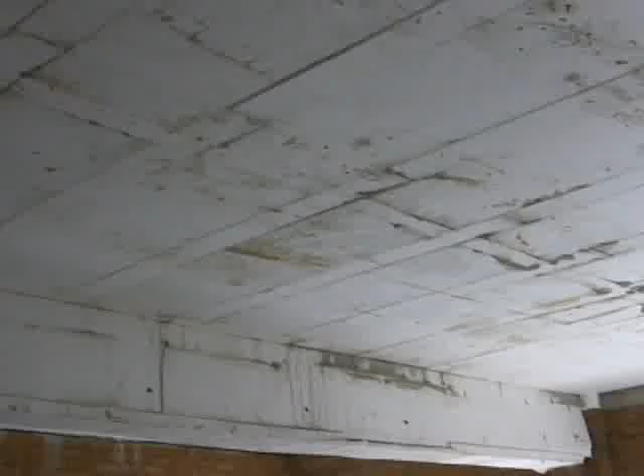Polyform grows out of many years of experience in the building industry in the field of design and manufacture of structural precast concrete. It unlocks the hidden potential of polystyrene for use in formwork. The inventions use polystyrene as formwork for all primary components in construction, namely suspended slabs, beams, stairs, walls and columns. We asked Wolf Binder all about Polyform.

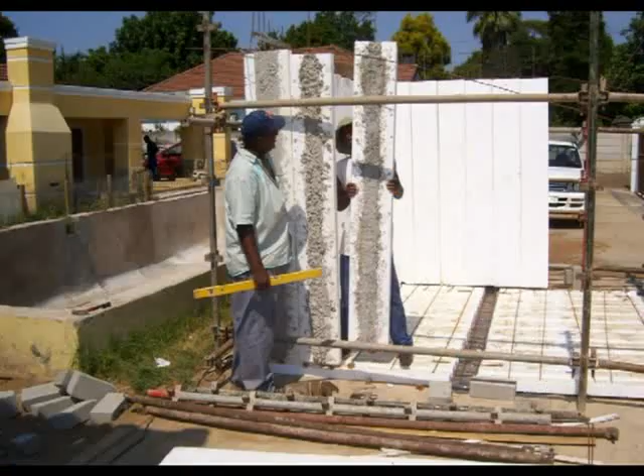In 1999, I received a call from a company in Cape Town asking if I was interested in buying an agency using polystyrene blocks in conjunction with precast concrete ribs for suspended slabs. I was already manufacturing precast concrete ribs in my precon factory and saw the potential in the use of polystyrene rather than precast concrete blocks.

However, I foresaw a problem as the coefficient of thermal expansion of polystyrene is far greater than concrete. This would cause cracks in the ceiling finish at the interface between the blocks and the ribs. I had some inspiration. What if I replace the concrete ribs with polystyrene and key these into the sides of the blocks? The bottom line is cost saving over the other systems, the principle of which is the number of advantages each component has. The polyslab has them all, and I knew I had a winner.

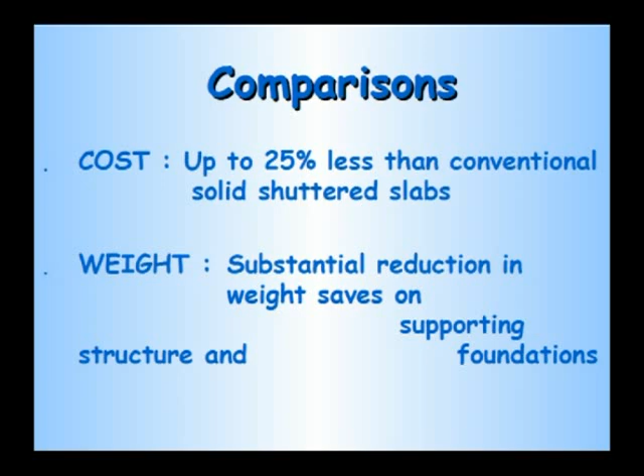Here they are, the blocks. Firstly, they act as fillers, replacing unnecessary concrete. Recycled polystyrene is less than half the cost of concrete. Secondly, the polystyrene is 2/100th the weight of concrete, resulting in massive weight saving. This weight saving dramatically saves on reinforcement required in the slab and reduces the size of foundations.

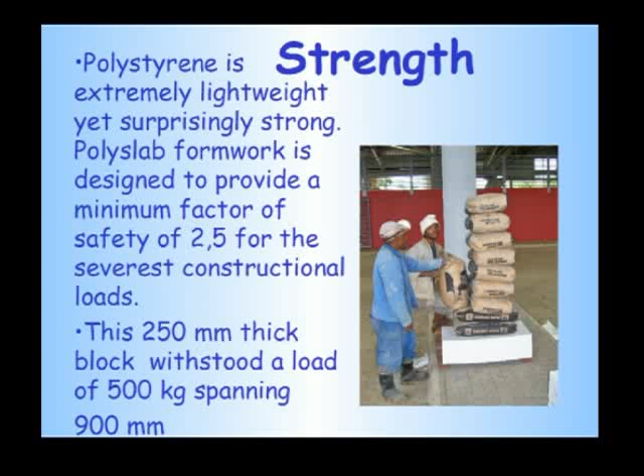Thirdly, they act as permanent shuttering and are strong enough to support the constructional loads and weight of wet concrete between lines of temporary supports. Fourthly, the excellent insulation reduces the need for air conditioning, resulting in substantial savings in the ever-increasing cost of electricity.

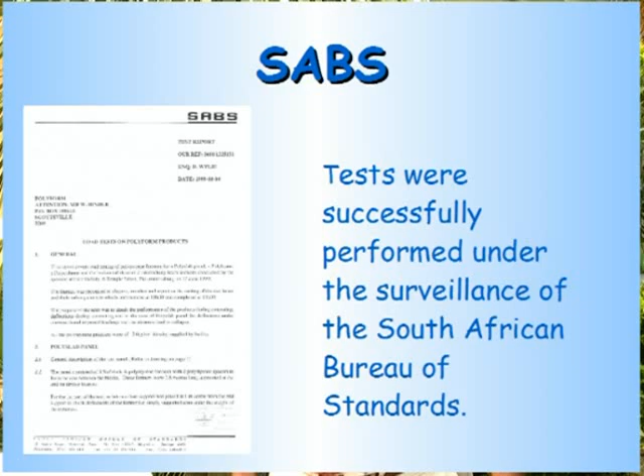The ribs, firstly, act as permanent shuttering. Secondly, by keying into the blocks, they are firmly supported. This also provides a seal against leakage of cement slurry. Fourthly, it also provides 15% constructional point load sharing between the blocks, proven by SABS tests. Fifthly, they provide additional insulation and a continuous polystyrene ceiling, avoiding cracks in the skim coat.

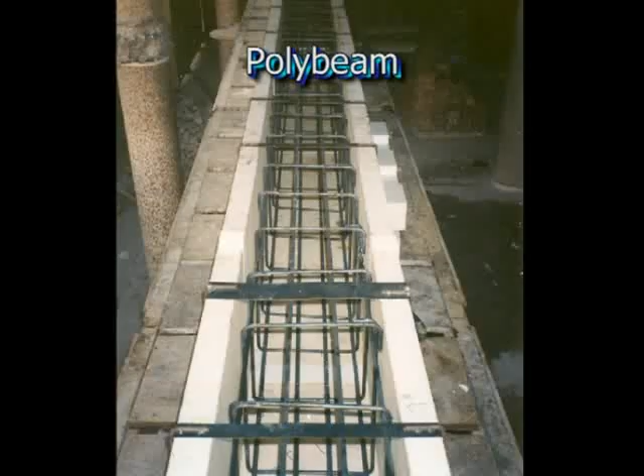We prepared design graphs for standard 2, 3 and 4 course deep poly slabs, which form part of a design manual available to engineers. I then invented the polystair system using the same design as a poly slab, but placed at the required angle. Polystyrene treads are then planted on the wet concrete topping, which are finished off with a ferrocement screed. High-density polystyrene formers for reinforced concrete poly beams and poly columns were also tested under the surveillance of the SABS. Polystyrene provided by our suppliers is fire retardant, non-toxic, moisture resistant, compatible with concrete and rot proof.

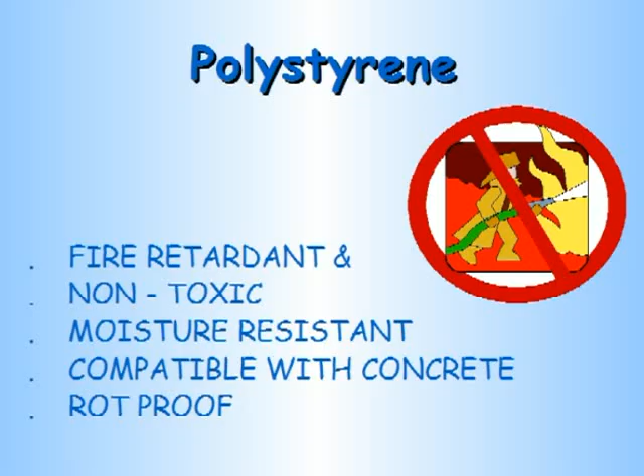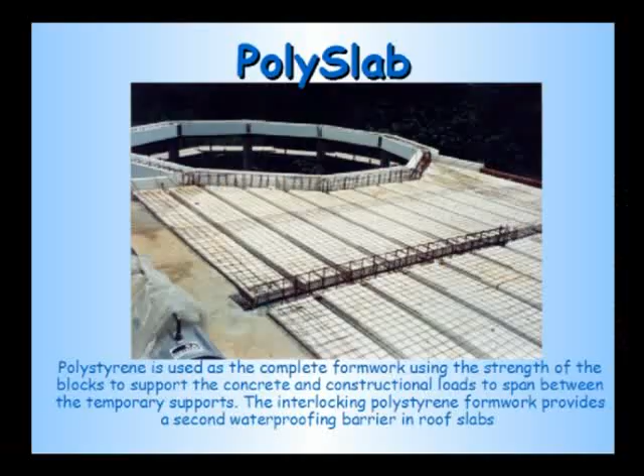The first builder to use the poly slab was so impressed with the price and ease of erection of the system that he bought an equal share in the business. From his investment, our patent attorneys conducted an international search of the poly slab, and we were granted a PCT patent. This opened opportunities to establish patents in 100 member countries and sell agencies of the products. Here are some of the first houses in which the Polyform products were used.

I received a call from the leader of a delegation of South African inventors asking me to join the team to the Geneva 2000 International Inventors Exhibition. I saw this as an opportunity to test our products on the international arena and was delighted when at the award ceremony we were first awarded the trophy from the Polish Institute of Inventors for the best exhibition on the show, and then a gold medal with a special commendation from the international jury.

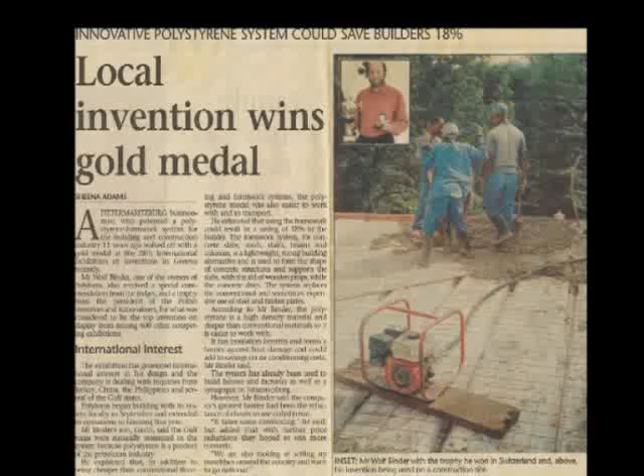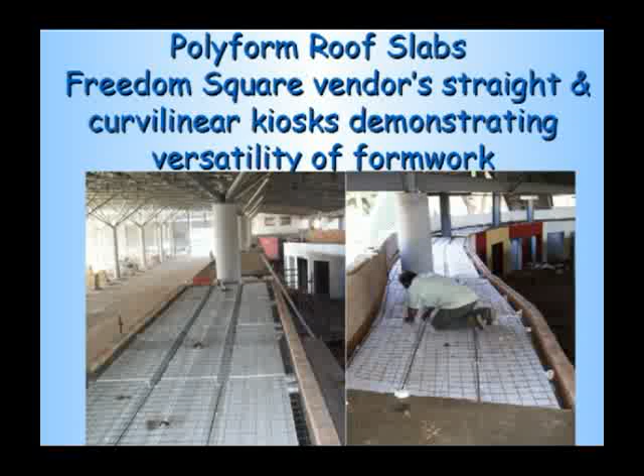In 2007, Polyform was awarded the contract of providing roof slabs over the vendors' kiosks in the Freedom Square taxi rank because it was the only system that could handle the curvilinear shapes. The Polyform retractable slab was used for a B&B in Hilton, as it has a suspended ceiling to provide space for services, making the ceiling configuration unimportant. The sides of the polystyrene blocks used have a slight taper, and the polystyrene is dressed with thin plastic sheeting to break bond with the concrete. This enables the formwork to be retracted and reused several times.

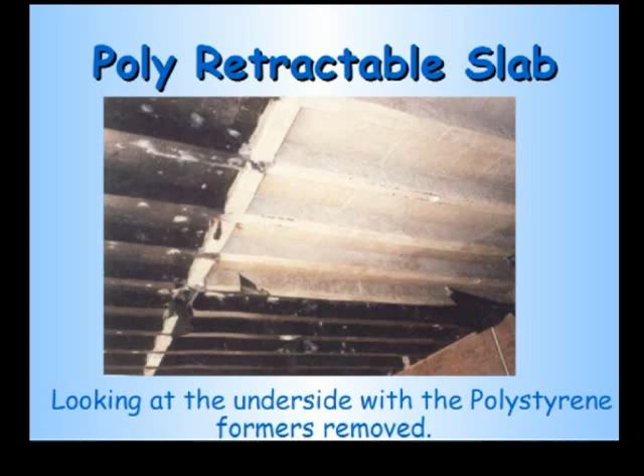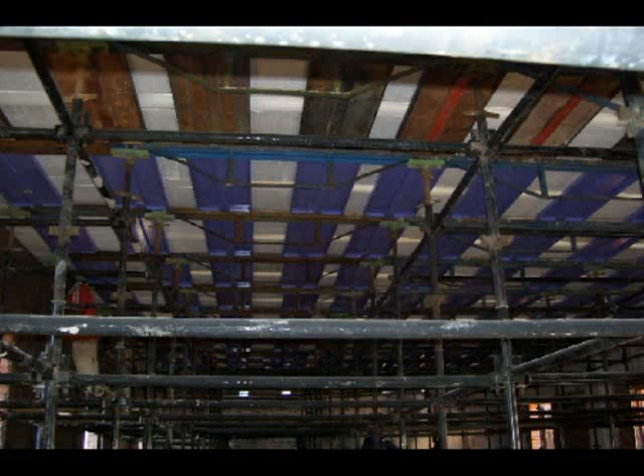The blocks used in poly slabs can be made to any depth, enabling spans far greater than precast concrete slabs. This slab used at the FET laboratory block is 500 mm thick and spans 9 meters. It also shows the typical temporary supports. Here are some of the buildings built over the last few years using the Polyform products.

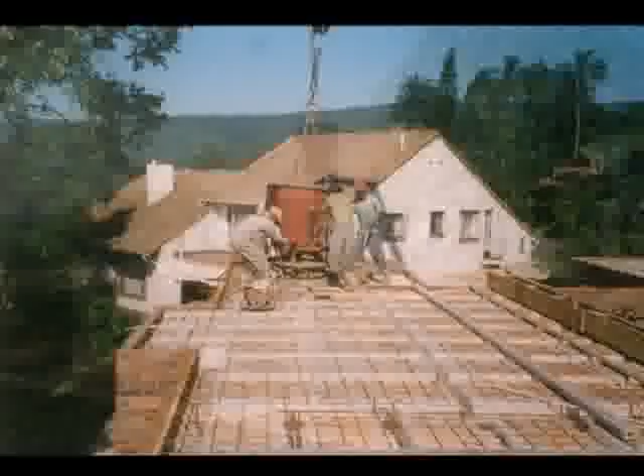Polyform also erects the formwork for all their systems. Hi, I'm Garth Roach. I've been associated with Polyform since the early days in the late 90s. I ran the Gauteng agency up in the little city. We did several projects. They all tended to have the same common feature in that they were creative.

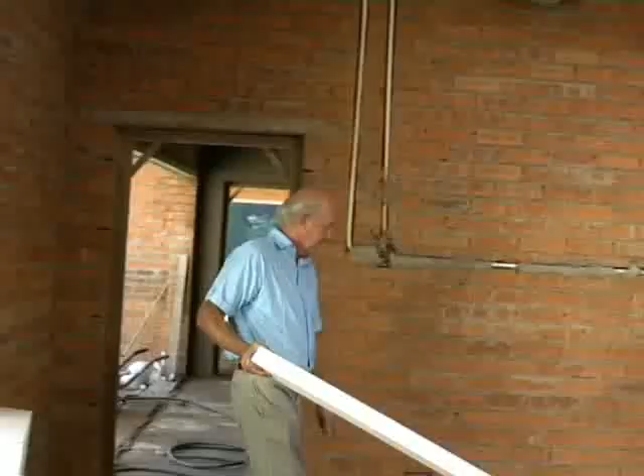One of the huge pleasures of doing a slab with the Polyform system is that this is the equivalent of 2 blocks which I can lift up and throw around like a tennis ball. This is a block from a typical rib and block system which I can't get above my head. So you can see the ease of it. This section here is a typical 1.8 meter rib former. This is a typical rib from a rib and block system which I can lift with some difficulty.

Hi Glenn, welcome, thanks for coming along to this. How did you experience the polystyrene, the Polyform formwork? Well, when we had our initial meeting, it was pointed out that it will save time, number one, and it will be easy to work with, and that we did experience. Getting the stuff from the ground floor to the first floor was very easy, and it's very user-friendly.

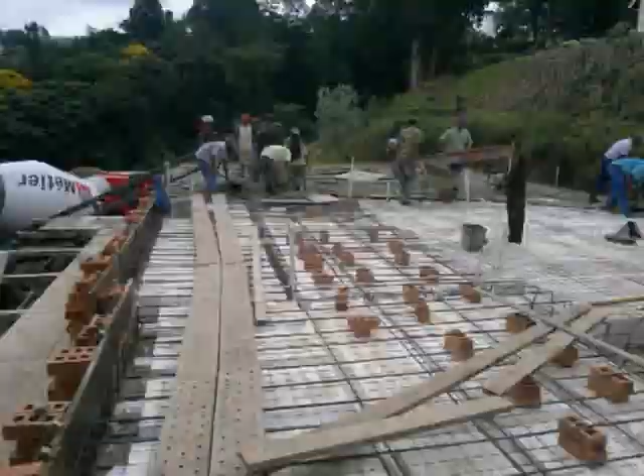How did you experience the scary part of pushing wheelbarrows and scaffold boards around when you were throwing the concrete? Surprisingly, the polystyrene was very strong. We did not have any pieces break, so we just put planks across, scaffold board planks, and it was very strong. And how did your subcontractors experience the thing, your electricians and plumbers?

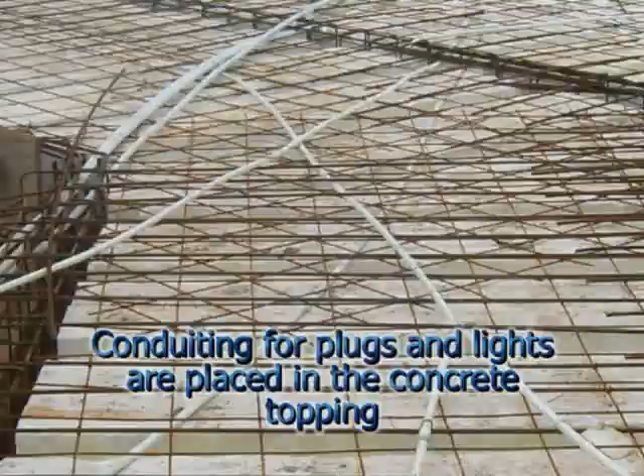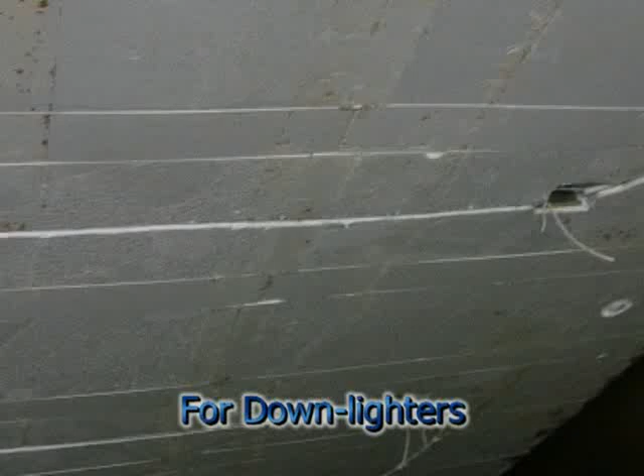At first they were skeptical. They wanted us to put a suspended ceiling, and that added tremendously to the cost. But then once you came in and showed them how simple it is, they did the 2 rooms in one day, where they had the piping, the boxes, and the wires in, all in one day. So they were very chuffed by the way it worked.

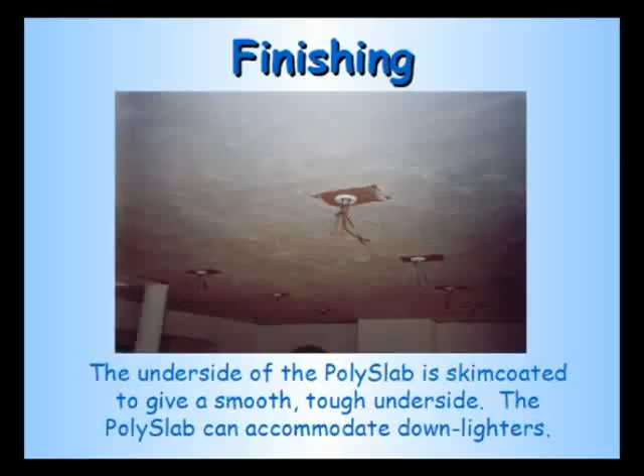But you're going to have to skim this roof. What do you think in comparison with the rib and block? What do you think you're going to experience? We've had a look at it, and we've climbed up just to get our level. There's very few bumps. With the block and lintel, while you're putting concrete, the block goes out of place, you get quite a bump, but it looks like it'll be very, very little packing on the Rhino lite, the Rhino glide.

I don't see much trouble here. And if you do have high spots, you can just wire brush it. You can wire brush it off, yes. And just take the high spots. Compared to chipping, that I am going to chip.

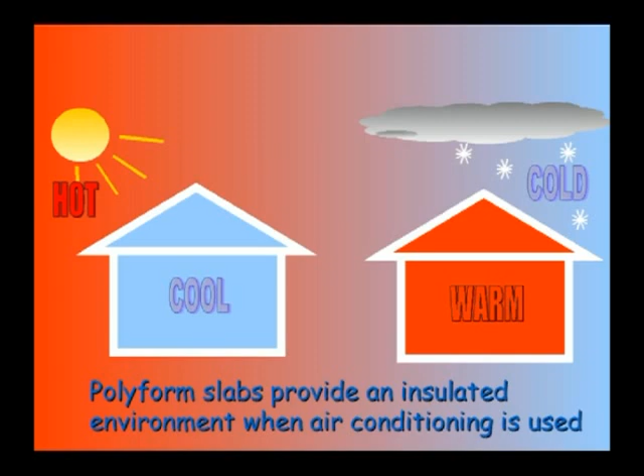The polystyrene in PolySlabs also provides free insulation. The BFBA Electrical Consultants report states that the savings on artificial cooling and heating is 10% of an electricity bill in summer and 5% in winter. Air conditioning may not be required at all, as there is a significant improvement in the comfort level of the building. We asked Patrick Gould about the comfort levels of a Polyform structure.

We built our house some 12 years ago, and our builder recommended that we use the Polyform system for the decking because we have an upstairs area to our house. But the main advantage for us is the fact that the comfort levels in the house are really very good. In winter, the decking tends to retain the heat downstairs, and in summer the house is exceptionally cool.

We've noticed other areas in the house where the decking hasn't gone across to that section of the house. There's a very distinct difference between the temperature levels under the decking and not under the decking. So we highly recommend this decking, primarily from an insulation point of view. What about direct savings over equivalent conventional solid reinforced concrete slabs?

Hi Andy, tell me a bit about your business. Well, I'm a quantity surveyor, but my background has been largely with contracting companies. My experience has been more on a hands-on practical approach. I've done a fair amount of time with the professional offices as well, but largely contracting.